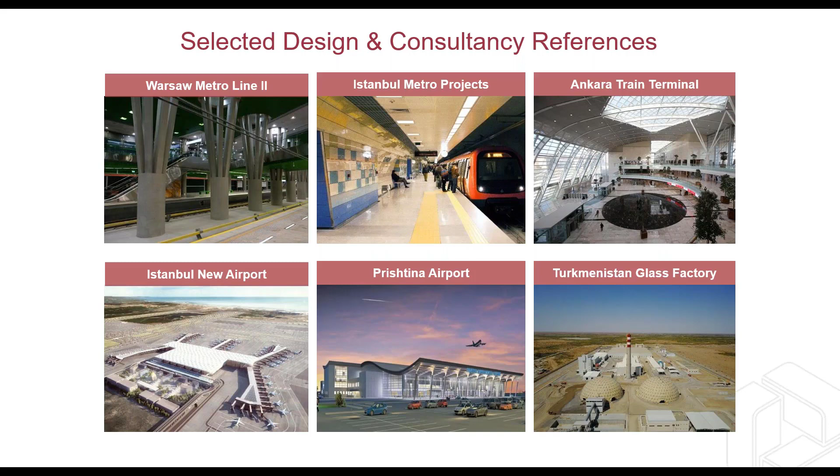So Prota Software is the software developer company. As I said, we are developing ProtaStructure, which is the ultimate solution for modeling, analysis, and design of structures.

Prota Details is for your automated detail drawings, reinforced concrete drawings. It includes intelligent rebars and design libraries, such as retaining wall, scaffold design, detailing, pile caps, pool design, and all the design and detailing libraries that you can use independent of your structures.

Prota Steel is our latest technology for your steel detailing and connection design. We have shop drawings and general arrangement drawings, as well as connection design reports.

Prota BIM is our BIM tool, which allows you to bidirectionally link your models with other BIM platforms, including Autodesk Revit. With the upcoming 2020 version, we will also support IFC import and imports of 3D DXF files. We already support the import of two-dimensional DXF files.

So ProtaStructure is the focused structural BIM design solution of Prota. Some of the capabilities are flexible 2D and 3D modeling, multi-material modeling with physical objects, analysis and detailed design to international and seismic design codes. Also, we provide full design reporting and quantity takeoff.

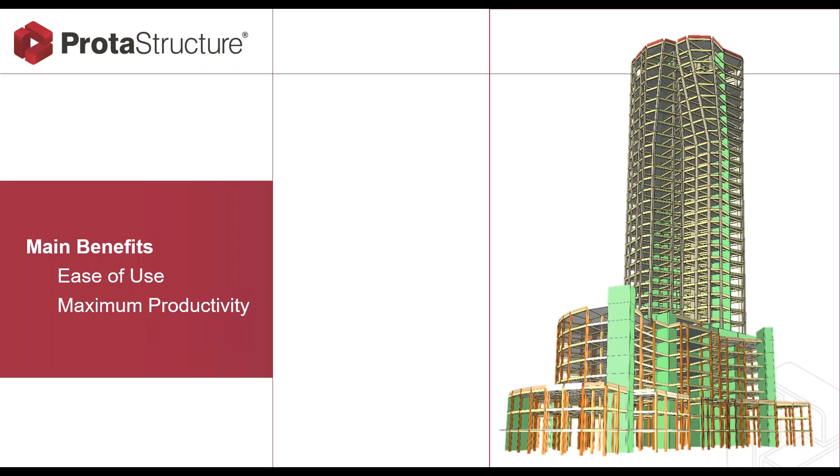So in a nutshell, the main core competencies of ProtaStructure are ease of use, fast modeling, and maximum productivity. What's our biggest advantage? As Prota, our biggest advantage compared to other solutions on the market is that we offer a comprehensive solution for our clients.

With ProtaStructure, you can design model buildings, then perform automated steel and reinforced concrete detailing with Prota Steel and Prota Details platforms. You can also coordinate your models with leading BIM players using Prota BIM. In other words, you invest in a single package and you possess all these technologies. From time to time, we demonstrate these technologies through seminars or webinars.

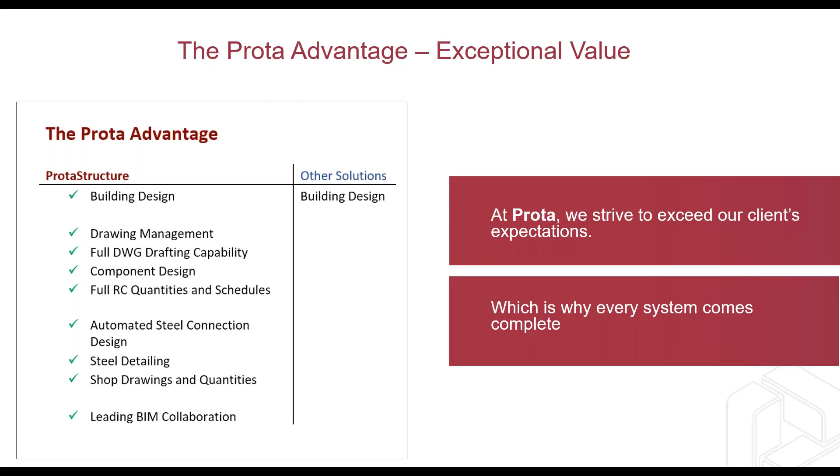But today, as I promised, we will be discussing performance-based design, in which ProtaStructure is quite powerful. So let's jump into performance-based design.

As you know, we have different design paradigms in terms of earthquake-resistant design. The conventional design paradigm is what we do: we design the buildings under a design earthquake, which usually has 10% probability of exceedance in 50 years. In other words, it will have a return period of 475 years.

What we do is design for strength under the reduced earthquake loads. We try to make sure that members are strong enough to withstand the demanded forces, and that inertia forces are safely transferred to the load-bearing system, like diaphragms or collectors. While doing that, we also try to ensure that the structure has the required ductility capacity.

What does it mean? It should be able to deform in the plastic region without losing significant capacity. And while doing that, we try to prevent brittle failure. We try to prevent undesired collapse mechanisms like story mechanism or loss of equilibrium. We achieve that by providing sufficient ductile detailing.

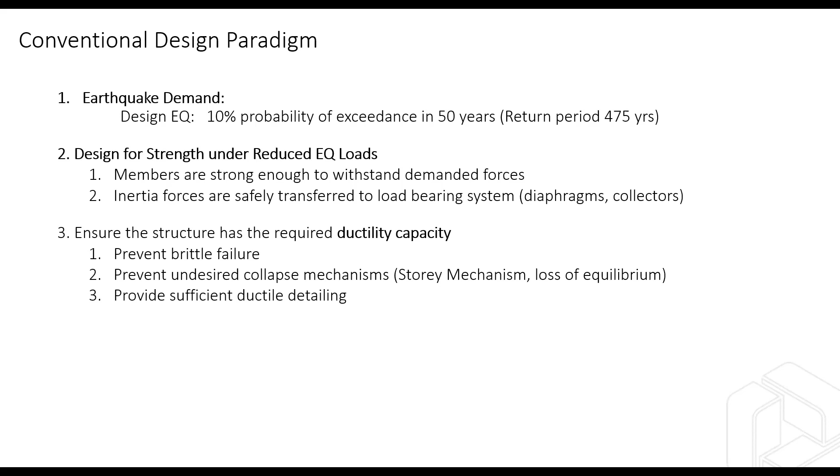If the structure was to behave elastically, we would have the elastic strength, which is Fe. But the structure, of course, behaves in a nonlinear manner. So we have a yield strength of Fy, which is nothing but the elastic strength divided by the yield strength reduction factor, which is Ry.

But we also have a design strength because we have material discrepancies. Materials can be stronger than we expect, or we may have more provided reinforcement inside the members. So the as-built structure may always be stronger than we anticipated. We also cover that with an overstrength factor, which is Fy divided by D. So this is pretty much the

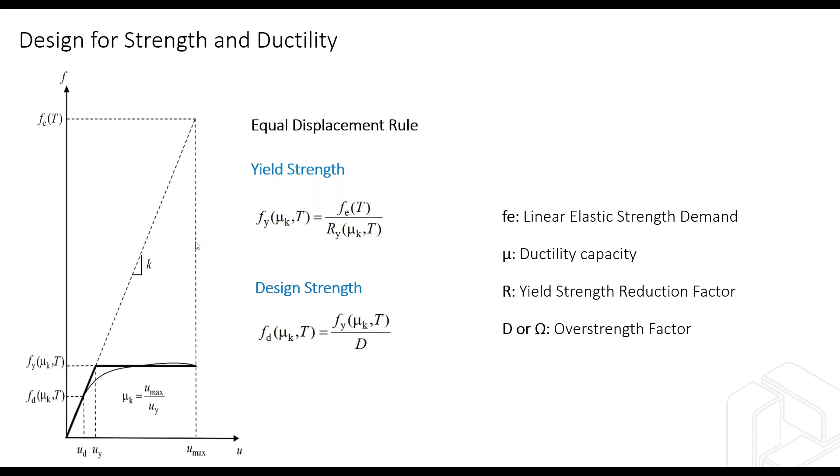conventional design approach. What we do is calculate the elastic strength demand. We assume a ductility capacity depending on the structural type and the building. We prescribe some reduction factor, called R, and some overstrength factor. By reducing the elastic demand, we design the structure under the design earthquake. Then we provide sufficient detailing to ensure the ductility. That's the conventional approach.

But why do we need performance-based design? I want to ask some questions. As I said, we usually design under a design earthquake with a return period of 475 years. So what happens if we have a severe earthquake with a return period of 2,475 years, or a very frequent earthquake with a return period of 72 or 73 years?

So what kind of performance do we expect from the building? Another question: what kind of damage is tolerable for us? No damage to structural and non-structural members, limited damage, or heavy damage but not collapse? What is our tolerable damage? And what is the cost that we can tolerate to repair the building after damage?

The conventional design philosophy tries to ensure the life safety of the building, life safety of the people living in the building, but the building can be damaged. Because of economical considerations, this damage must be repaired. So what kind of cost can we tolerate to repair the building?

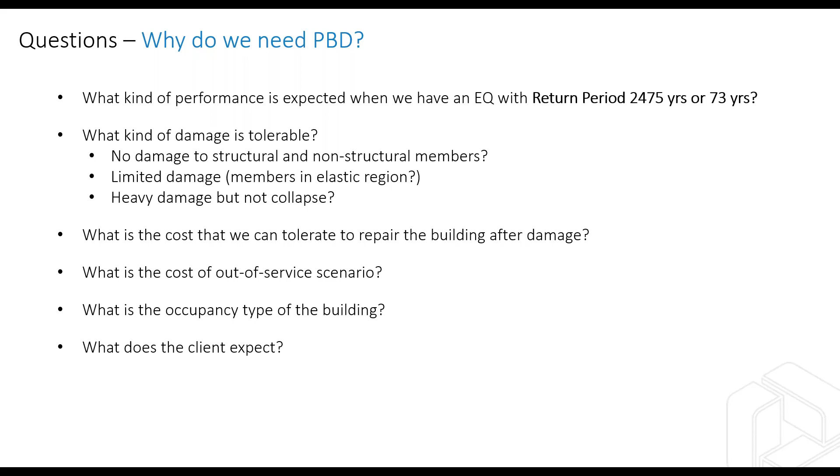And lastly, other than necessities or other code requirements, what does our client expect? Because we are engineers serving clients. If the client has money, they can expect an advanced performance scenario—a client may not even want to wake up when the earthquake happens. These are the questions that lead to performance-based design.

So for the performance assessment, we have the two faces of the medallion. In fact, for new buildings, if we are requested to design a new building with performance-based design, our job is relatively easy because we are in control of architectural and structural design. Building is new, we are in control of materials that we will use. We decide on the budgets versus expected performance. And we can also fine-tune the system by using seismic devices like isolators, viscous dampers, and so on. So for new buildings, performance-based design will allow us to consider these items.

But for existing buildings, we work with existing material and structural system. We may have existing damages to structural members, which is very critical. They may be repaired or they may be beyond repair. So there is an unknown factor, or if we didn't do sufficient survey in the building, we may have missed out these damages as well.

The architectural function is important. While retrofitting the existing building, you must not prevent architectural usage too much. So we must be careful with the architectural function as well. So that's another difficulty in existing buildings.

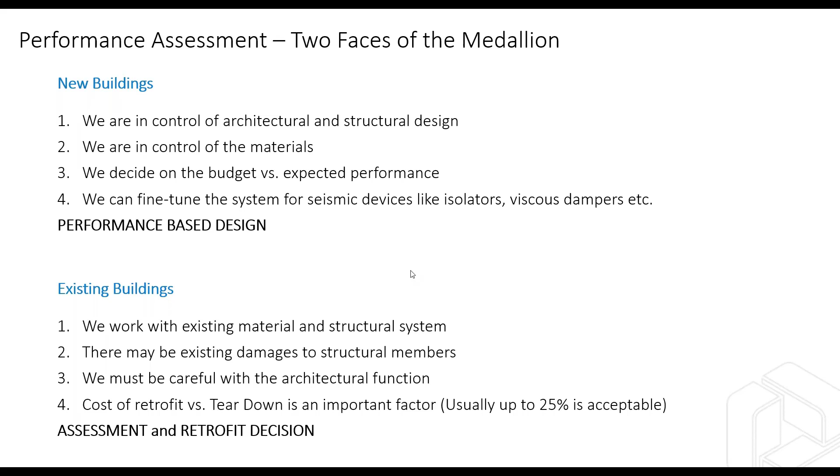Also, cost of retrofit versus tear down is an important factor. Usually up to 25% is acceptable. So if you are going to tear down the building and rebuild it again, if the retrofit cost is not exceeding 20-25%, it can be acceptable, but more than that should be considered. So after assessing the performance of an existing building, we decide on retrofitting the building or tearing it down. So there are more unknowns and more parameters out of our control in existing buildings.

I want to talk about analysis approach while we are designing the buildings against earthquakes. So, of course, the simplest approach is the linear elastic analysis. And the finite element members that we use in linear elastic analysis are also assumed to be linearly elastic, so force deformation relations are constant. That brings us ease in modeling and less computational effort. But of course, in terms of nonlinearity and performance assessment, linear elastic behavior is not so accurate because it doesn't have any damage memory. It doesn't behave nonlinearly.

So although it's the simplest approach, it's not so accurate for performance assessment purposes. It's quite acceptable for conventional design, as I explained before.

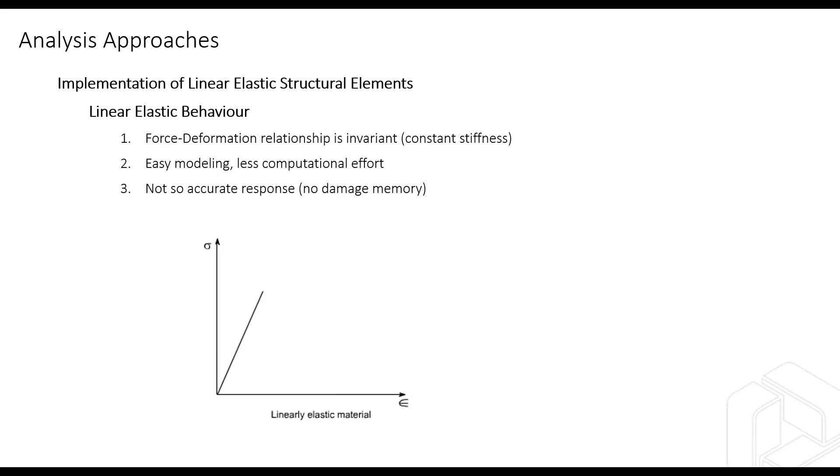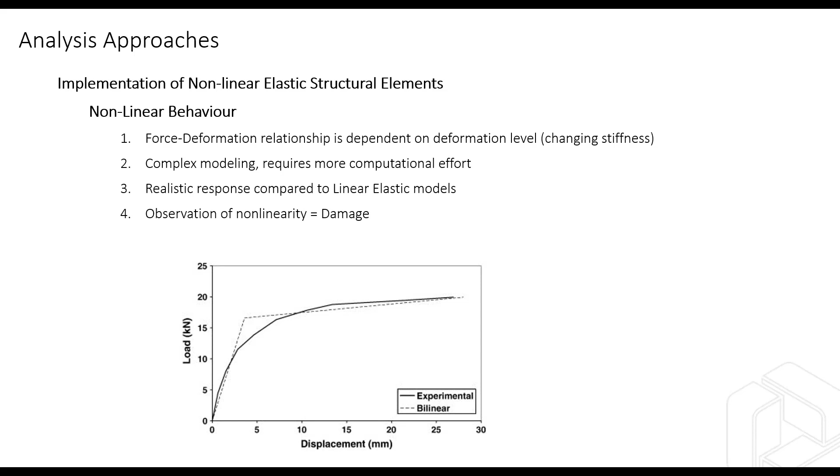The alternative is the nonlinear elements and nonlinear analysis. So when we use nonlinear elements, what we mean is the force deformation relationship is dependent on the deformation level, so the stiffness is changing. Also, it requires complex modeling and more computational effort. It's more realistic, and also the nonlinear force deformation means a representation of damage. So nonlinear approaches are more accurate in terms of performance assessment.

So for conventional design, what we use as linear elastic analysis is, first of all, the simplest one, the equivalent static method. Equivalent static method, of course, does not consider the effect of higher modes. That's the most important drawback of this static force approach. It does not consider higher mode effects. It's usually valid for relatively regular buildings with high mass participation.

But since it is approximate, seismic codes are applying penalties to that. If you have floor torsion, you have to increase the accidental eccentricities. If you have weak stories or soft stories, you have to change behavior factor or you have to change your method of analysis. So it's the simplest, but it's the most approximate approach.

The other approach for linear elastic analysis is response spectrum analysis. It's a good approximation, actually. But still, it assumes that the modes are independent. It assumes no mode coupling between the modes, and also it's based on calculating the pseudo responses of undamped modes.

So for linear elastic systems, it's quite a good approximation. But there are some disadvantages. One of them is after SRSS or CQC combination, we lose the force displacement signs, and of course we lose the equilibrium. Although we calculate the base shear, we have to scale the base shear up to static base shear level. That's another thing we have to do. Another disadvantage, or the point that we must pay attention to, is the mass participation. It's an issue. If we don't select a sufficient number of modes, then higher mode effects can be skipped.

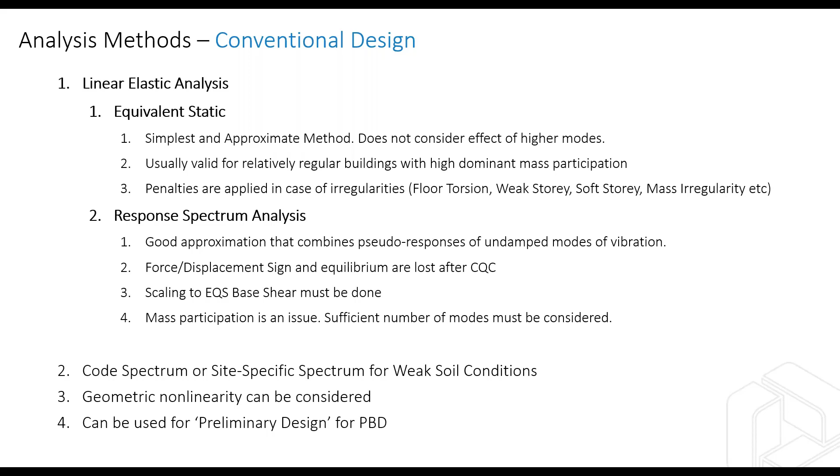Conventional design or linear elastic approaches can also be used as a starting point for performance-based design. Because nonlinear assessment requires section sizes and rebars to be available as input, we have to do a preliminary design first, using conventional design approaches as a starting point.

So for performance-based design or assessment, what kind of analysis methods do we have? First of all, we have linear elastic assessment methods.

In the literature, researchers always tend to invent new methodologies or easy methodologies that everyday practicing engineers can make use of efficiently, because as analysis methods get complex, the computational effort, assumptions, and parameters get more rigorous and difficult. So the simpler the method, the easier it is to use by practicing engineers.

One of the methods that's quite easy to implement is the linear elastic assessment method. In this method, we perform an equivalent static or RSA analysis, like in conventional design, but in this case we assume the reduction factor is 1. We don't reduce the elastic demand.

We assume the building is not important, so the importance factor is 1, and the additional eccentricity is 1. We normalize the building, we don't assume any ductility, and we don't assume any additional eccentricity. We use the elastic conventional design to calculate the elastic responses.

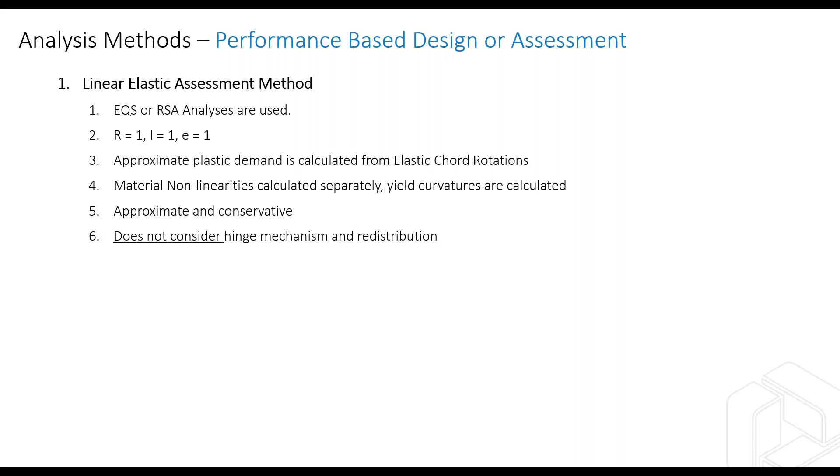Another widely used method of analysis is static pushover analysis. Simply, we incrementally load the structure until it is not stable. While pushing it in the X or Y direction, we plot the base shear versus roof displacement.

Then we convert that shear versus displacement graph into the spectral acceleration and spectral displacement domain, and we compare it with the target spectrum to find the demand that the earthquake demands from the structure.

In this analysis, material nonlinearities are considered in the critical sections where we expect the highest demand.

But one serious disadvantage or drawback is the lateral load vector. Since we push it with a certain type of load vector incrementally, the shape of that load vector affects the results a lot. Some alternatives are constant loads, inverse triangular loads, or the shape of the first modes. Usually we use the first mode, but the ideal shape is the nonlinear deformed shape.

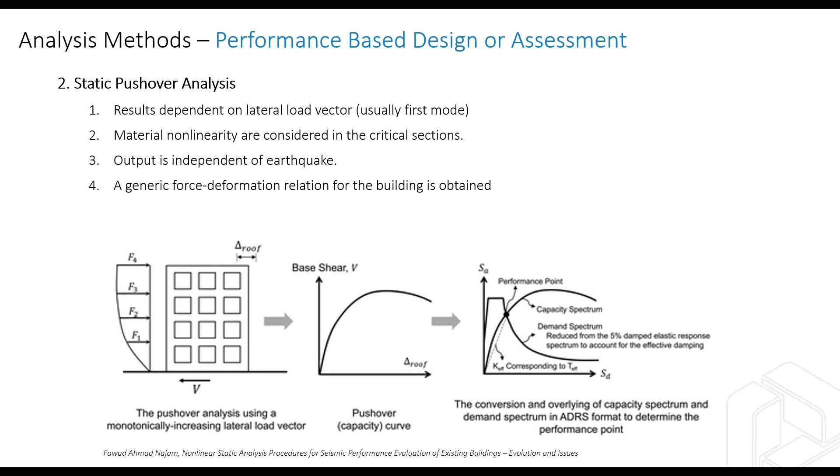As I said, the single mode static pushover is considered an approximate method because of the higher mode effects. In fact, it is not applicable for buildings more than 8 or 10 stories, or buildings which have participation factors less than 70% mass participation, or buildings with high extreme floor torsion situations. This static pushover will not be applicable.

So in the literature, we have other methods like multi-mode pushover analysis. But unfortunately, in this field, there are multiple approaches. The main problem is the superposition problem. Since most methods assume modal coupling is ignored, we usually cannot go back and superpose the nonlinear system. We cannot just combine them with CQC or SRSS.

That's the main drawback. But of course, there are several publications and methods developed. They either combine loading first, or after loading combine response, or do a series of pushover analyses and combine the results. Unfortunately, there isn't a widely accepted method currently available. The static pushover, unlike multimode, has been used for a very long time and is somewhat generally accepted, but we don't have any widely accepted method for multimode pushover analysis, and there are no recommendations on that.

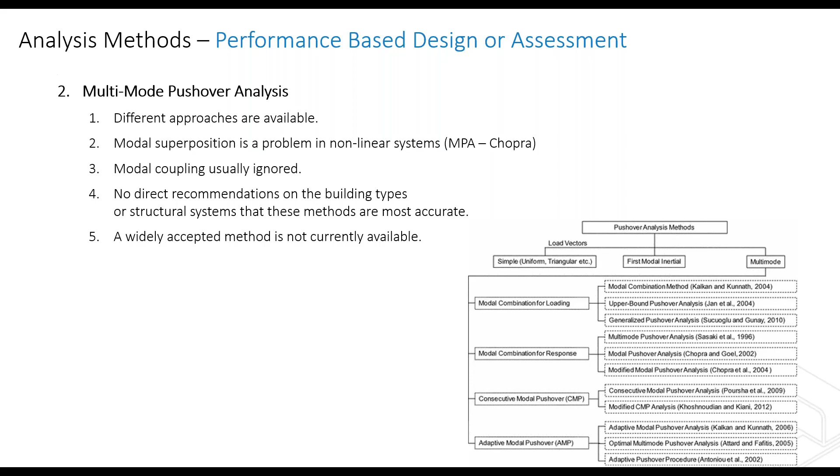And finally, we have the nonlinear time history analysis. This analysis is considered to be the benchmark in the prediction of response. We have an accelerogram, a ground motion record, and by using the dynamic equilibrium equations, we apply this acceleration to the building with direct integration or modal response history methods. But since the accelerations are both negative and positive, we need hysteretic material definitions.

That's one important thing. Also, if you remember the dynamic equilibrium equation, we have acceleration, which is multiplied with mass. We have displacement, which is multiplied with stiffness matrix, and we have the derivative of displacement, the speed, which is multiplied with damping matrix. But as you know, damping...

Damping is not a very easy parameter to obtain. So what we do, we usually assume 5% critical damping for reinforced concrete structures, but it's just an assumption. It's during the earthquake, because of the cracks that happen in the concrete or damages, we assume that approximately there is a 5% damping.

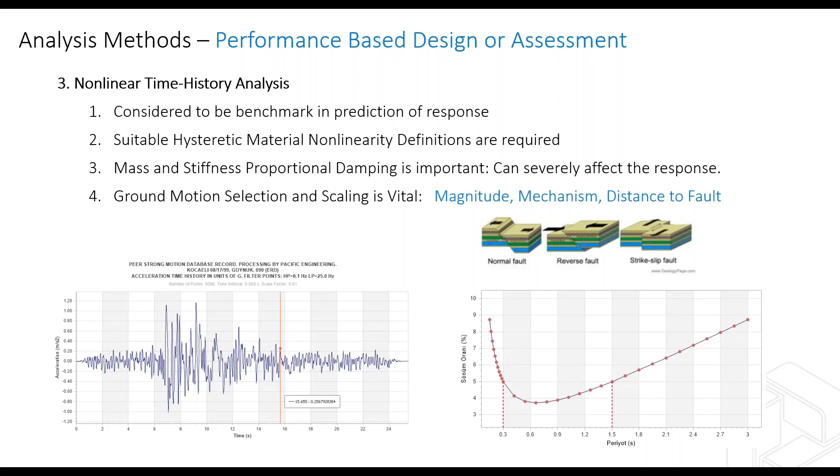But that's not finished. After you process your ground motions, you must use 3 to 11 ground motions. You cannot just use one ground motion. You are not allowed to do that. You have to use 3 to 11 motions, and at the end of the analysis, you must calculate their maximum or average responses.

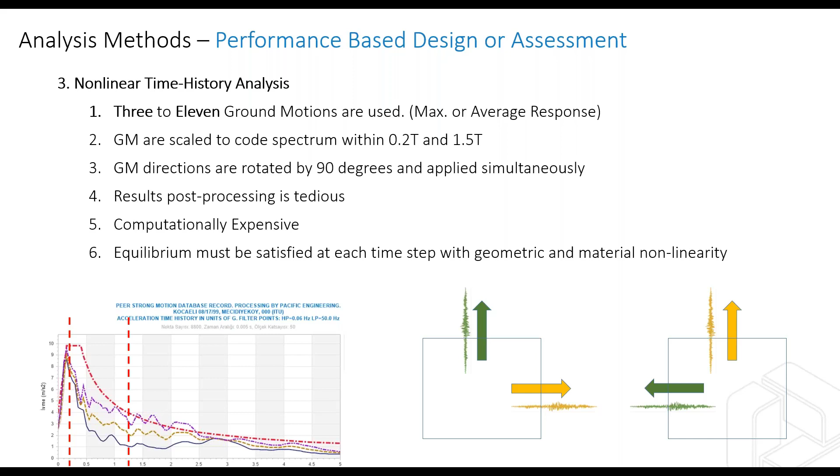As a consequence, we can say that post-processing of nonlinear time history is quite tedious. Also, the analysis itself is computationally very expensive because equilibrium must be satisfied at each time step with material nonlinearity, because we assume that we have distributed or lumped plasticity at the critical sections. And if you include geometric nonlinearity like P-delta, you have to also iterate for those as well. So it's a very complicated and computationally expensive analysis.

So that was pretty much the nonlinear analysis methods. As you are aware, I'm not showing anything in ProtaStructure because performance-based design topic is quite theoretical, and in order to proceed with the computer software, we must understand the underlying theory and underlying analysis and modeling approach very clearly, so that's what I'm emphasizing today. I'm sorry if it is a bit boring for you.

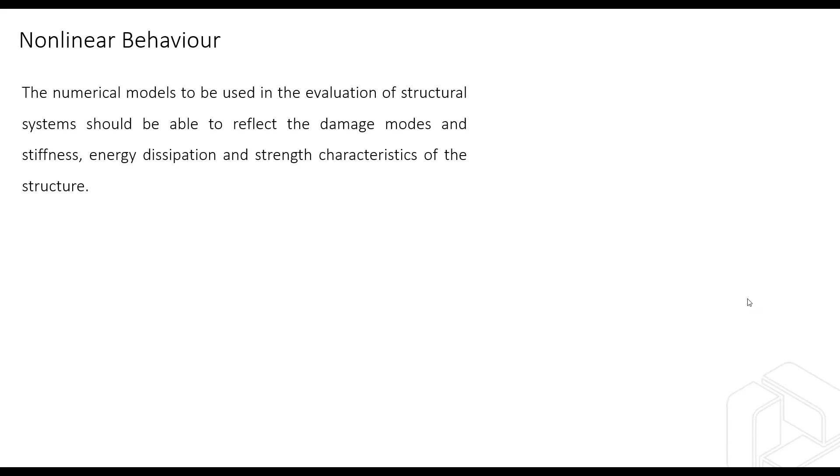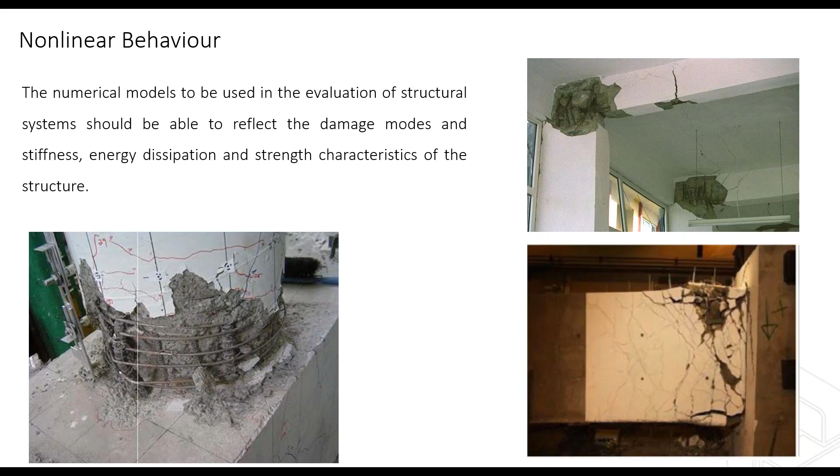So in all these pictures, you see some sort of damage in the structural members, and deformation characteristics. The numerical methods we use must be proficient enough to reflect these damage modes and energy dissipation characteristics in the model itself. Usually these damage modes, stiffness and energy characteristics are calculated from experiments, and material models and nonlinear models are developed. These must be reflected in our simulation models. What we do with the software is, of course, simulation.

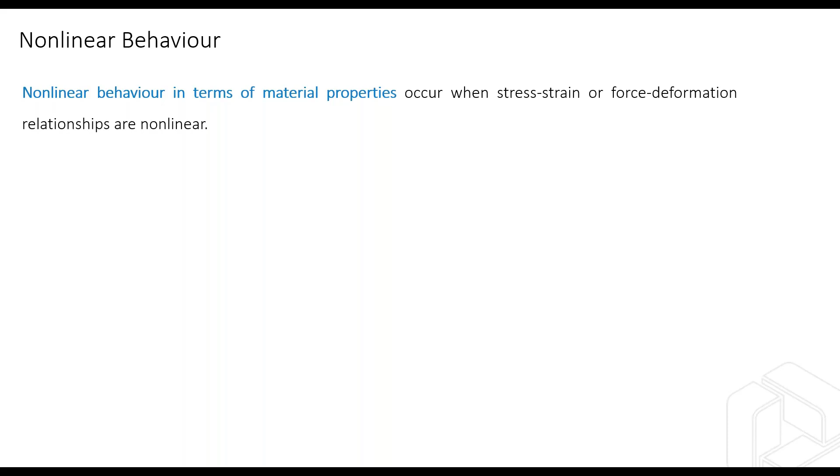We have material nonlinearity, which occurs when the stress-strain or force-deformation relationship is nonlinear. That's what we call material nonlinearity. Geometric nonlinearity is different. The material can be linear, but because of the geometry, imperfection, or dimension of the structure, we may have second-order effects like P-small-delta or P-large-delta. Then we will have unexpected moments, unexpected increased internal forces due to these imperfections or simply geometric characteristics. So this is what we call geometric nonlinearity.

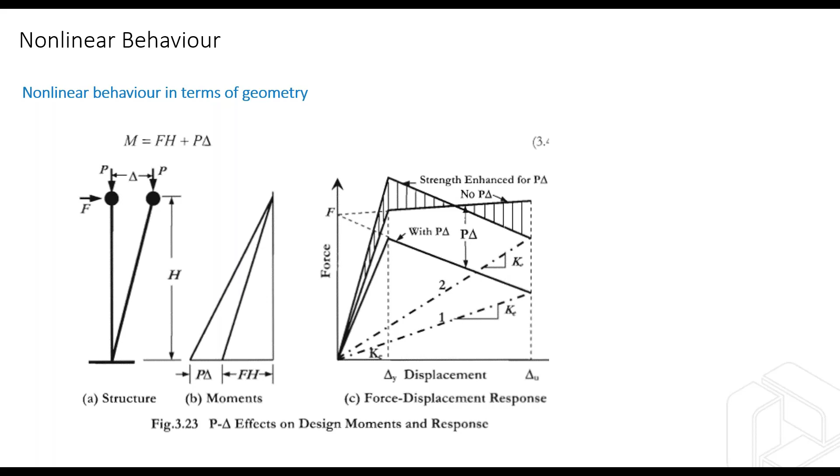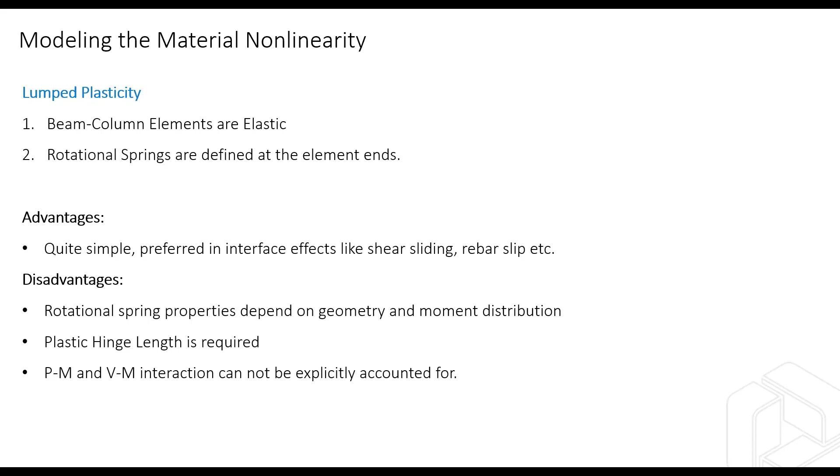And what about material nonlinearity? If you forget about geometrical nonlinearity for the moment, for material nonlinearity, one of the methods we use is lumped plasticity. In this approach, beam column elements are elastic and rotational springs are defined at the end of the element nodes. So at the critical sections, we have two rotational springs, assigned stiffness characteristics compatible with the material properties, but the beam column element in between is elastic.

The advantage of this is it's quite simple and not computationally very difficult. It can be preferred for interface effects like shear sliding or rebar slip because the output it gives is a plastic rotation. You can compare this plastic rotation value with the plastic rotation limits you obtain from experiments, for example. In a certain experiment, you may have a plastic rotation limit that also includes a rebar slippage factor, etc. So the macro output, the plastic rotation, is quite useful, but it has disadvantages, of course.

Rotational spring properties depend on geometry and moment distribution. We need a plastic hinge length to estimate the extent of nonlinearity in the critical section, but it's usually taken as the dimension over 2. Most importantly, especially in column elements, we have an axial load moment interaction. We cannot really explicitly simulate or reflect the axial load moment interaction in lumped plasticity models. What we supply to the software is the moment-rotation relationships, and we also supply interaction relationships. When the critical section reaches its capacity, we try to stay on the interaction curve so that we can honor the axial load moment relation.

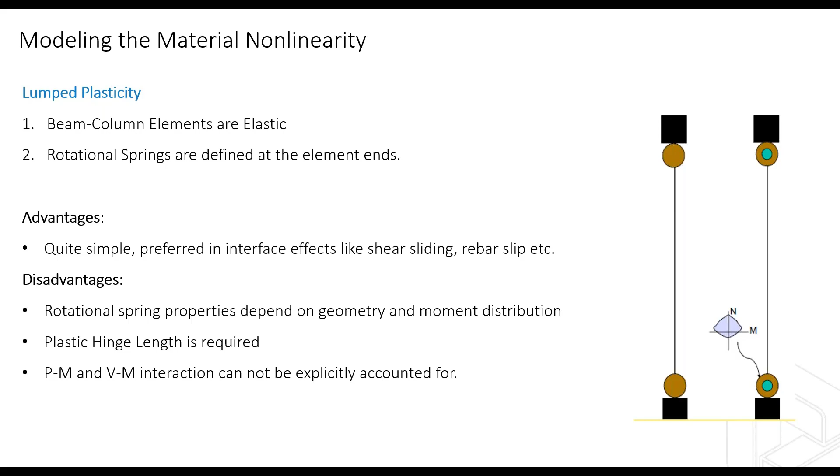The state-of-the-art approach at the moment is to use fiber sections. What you do is mesh the concrete section together with the confined and unconfined concrete and the steel bars. By using these fibers, you connect these section stiffness matrices to building stiffness matrices. That's the most advanced approach. Other than that, by using this fiber analysis, you can obtain the force-deformation relationship and assign them to the plastic hinges as well.

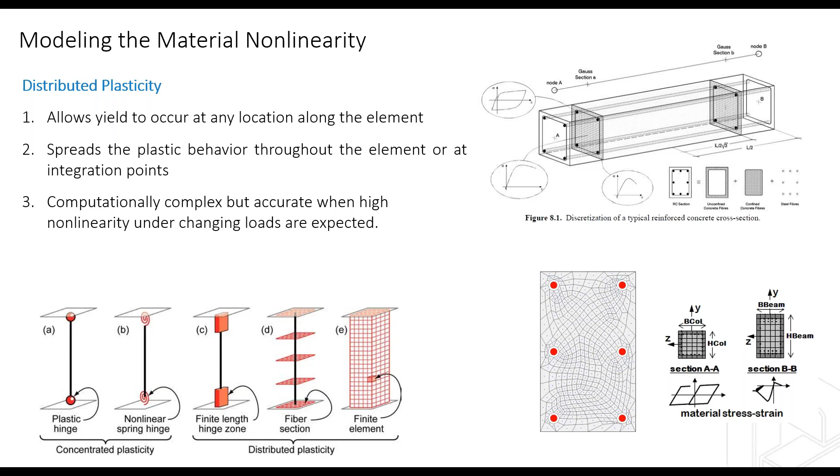That's another approach, but what we do in ProtaStructure is we use distributed plasticity. We use the finite length zone approach. It is not a fully distributed plasticity; it's actually a trade-off for simplicity. It's not fully nonlinear - nonlinearity is confined to the end regions. We expect the highest demands at the end, so we use distributed plasticity at 6 integration points in these confined regions, and the element in between is a linear elastic element.

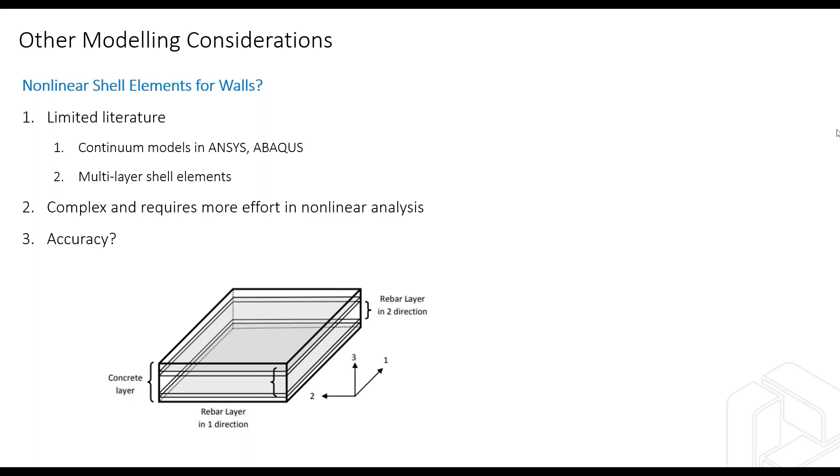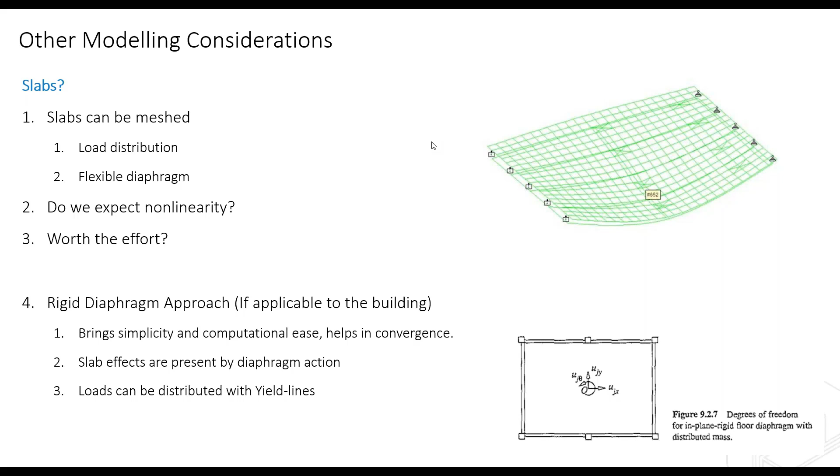You can also distribute the loads with yield lines; you don't have to mesh for load distribution. Of course, these remarks only apply if your building permits this. If you have a highly irregular building with gallery openings, separate diaphragms, or slabs that cannot act as a rigid diaphragm, then you'll have to use slabs as finite element mesh.

What about non-structural members? In buildings we have partition walls and machinery. What we usually do is include their loads and calculate them during design, acting on the structural members. But in performance assessments, if you desire, you can model infill walls with simple approaches, including them as compression-only composite strut and tie models. If you push the building from one direction, the compression members will be active; if you push the frame the other direction, the compression will be reversed. So you will need to spend some effort doing that.

But the question is, of course, is it really worth it? I want to put a question mark here too, because people usually tend to model everything in the building, but at the end of the day the results may not be accurate, or it may not be worth the effort.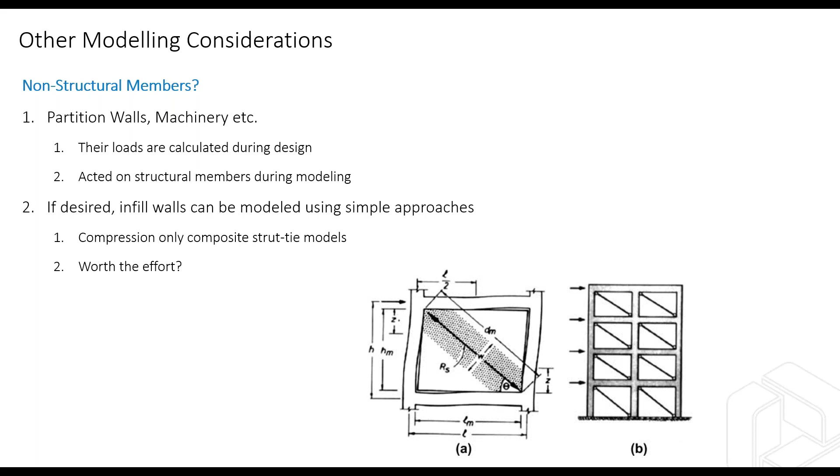Another question mark I want to put here is soil-structure interaction. What can we do if we expect nonlinear soil behavior, and what if we have piles and pile groups under the building? How will we model the lateral pile supports, the effect of the soil on the piles and on the upper structure? These are all big question marks, really big question marks.

So after discussing this modeling approach and analysis approach, what do we do for performance-based design? What is the essence of the thing? For performance-based design, we want to reach a target performance. For example, from the Turkish earthquake code, for new buildings we have regular performance targets and advanced performance targets. If you pay attention, the regular performance target is nothing but controlled damage.

It means the building should satisfy life safety requirements with repairable damage, using the strength design method. When we apply the code clauses and equations under the design earthquake with a 500-year return period, this condition is satisfied. But what if we have a different building? If we have a critical seismic design category, meaning the building is higher than 70 meters, experiencing high spectral accelerations, and has an important occupancy, then we have to satisfy three different performance levels simultaneously. For the design earthquake, the performance target is the same.

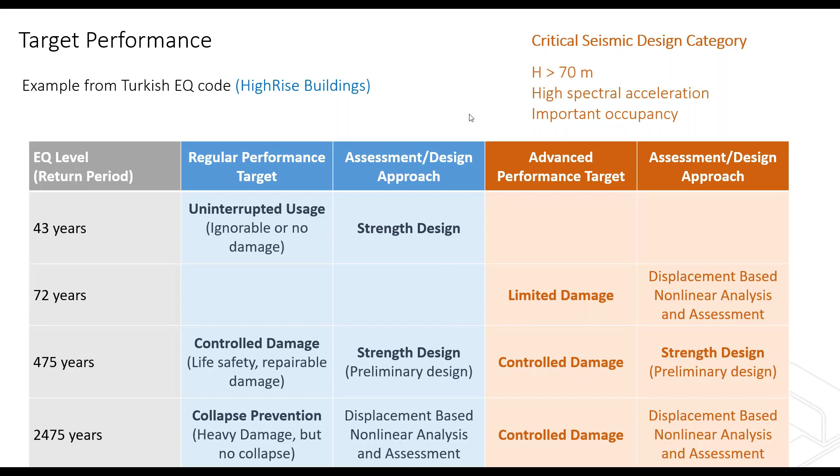Existing buildings are similar, so first of all, for existing buildings, we cannot use any strength design because the building is existing. We cannot assume any ductility or attach any ductility to the building, so we must use a displacement-based assessment, and we must satisfy these conditions.

So why did I give you these tables? Because I think it's very important to understand this if we want to understand performance-based design. Unlike strength design, when we start the project, we have to look at these tables and understand what kind of performance criteria we should be satisfying for the project. That has to be defined and decided before starting the project. The analysis methods are dictated or recommended by the guidelines or by the codes.

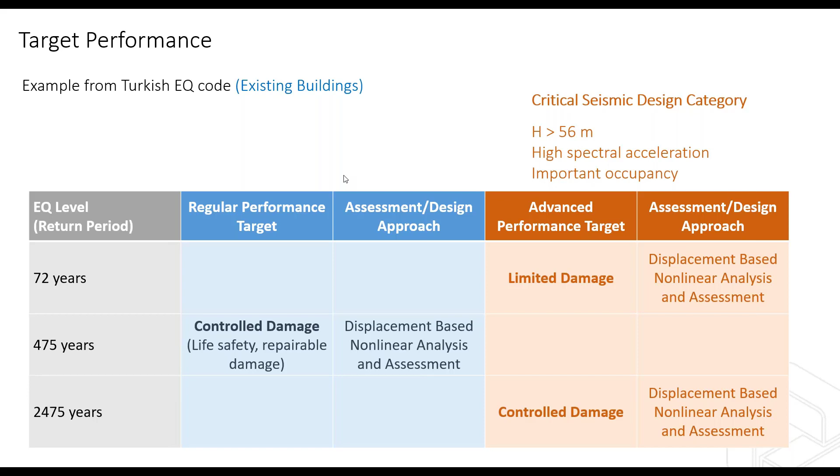Usually for the assessment of buildings, a peer review is required by the Turkish codes, as a side note. And of course, after setting these targets, what we do is check the members to see if they satisfy the target performance.

For example, if we are using lumped plasticity models, we have to use the plastic rotation limits. For collapse prevention, we have plastic rotation limits calculated with a formula. For controlled damage, the limit is 75% of this plastic rotation. And for limited damage, of course, we don't expect any plastic rotation in the members.

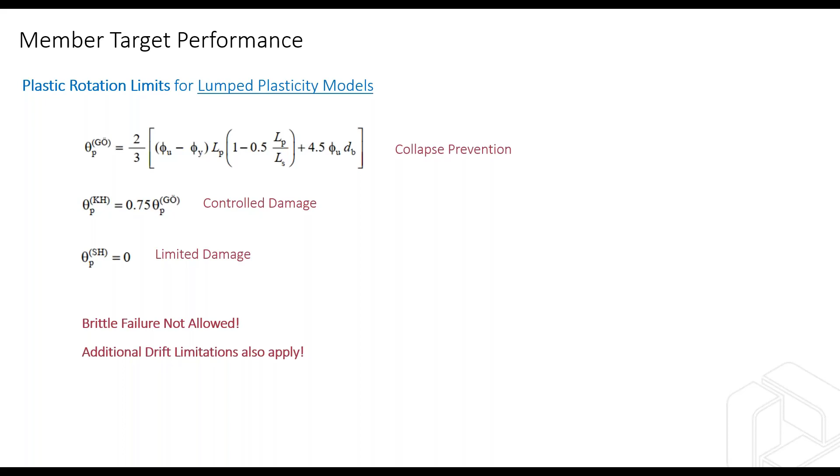What we do is classify the members according to this, and we reach a conclusion—so if the building itself satisfies the performance or not, we simply count the members. Of course, brittle failure is not allowed, and additional drift limitations apply. The plastic rotation limits may be satisfied, but a building may still be violating some drift limitations.

That's another thing. If you are using distributed plasticity, then we must compare the concrete strains and the steel strains—the most critical concrete strain and the most extreme steel strain. These limits are also given in the codes or guidelines. For each member, you have to satisfy these limits, so you count the members again and classify accordingly. Again, brittle failure and drift limitations must be paid attention to.

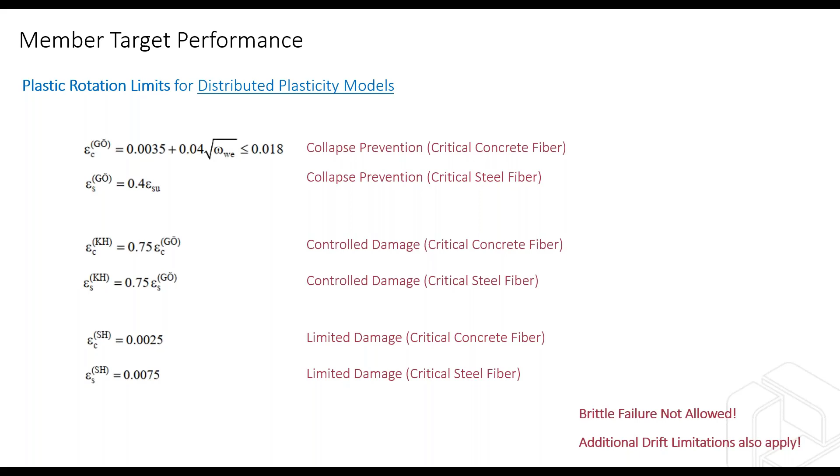So this is pretty much the theoretical part that I want to cover. I hope I could explain it to the best of my knowledge. Now I will briefly show an example in ProtaStructure.

I will try to assess a typical school building. It's a 3-story frame structure with 14 megapascal existing concrete and 220 megapascal existing reinforcement. Actually, these kinds of schools are very common in Turkey, built before 1997, 1999, and we had lots of these school buildings. We, as Prota, also retrofitted lots of these school buildings.

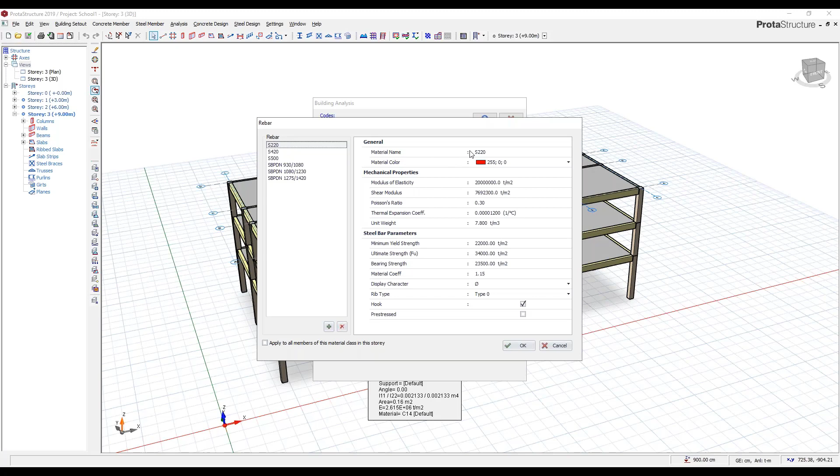So as a result of surveys or blueprints of the building, we see that the columns, longitudinal bars and links have a characteristic yield strength of 220 megapascal. Okay, so this is the existing material, and we have the existing geometry already defined in the building.

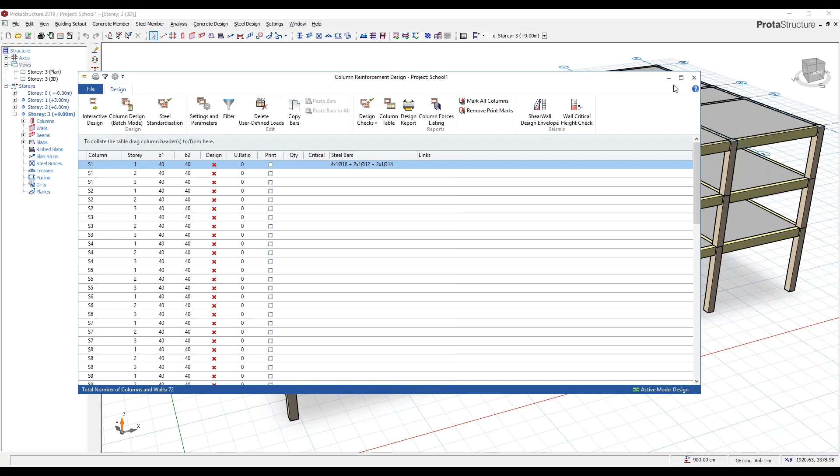At this point, what is missing is the existing reinforcement. If you have the blueprints of the building, what you can do is go to the column design menu, double click, and without doing any design, you can change the rebars.

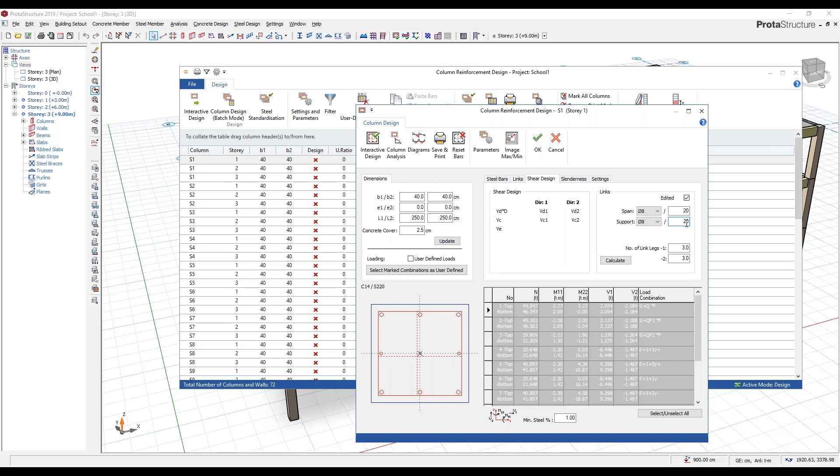You can set the links, like in the span region I have phi8/20, and in the support region I have phi8/15, very minor or no confinement as well. Maybe it could be the case - some of the buildings do not have any confinement in their support regions of columns.

So what you can do is just enter the reinforcement information and hit OK. You don't have to satisfy the design status here. All you need to do is enter reinforcement information.

This design status can be a red cross - we are not aiming to design the column, we are just aiming to enter the existing reinforcement information. That's what we want to do. So that's why I only enter the reinforcements, longitudinal bars, and links, and I press OK. I don't care whether it is green or cross.

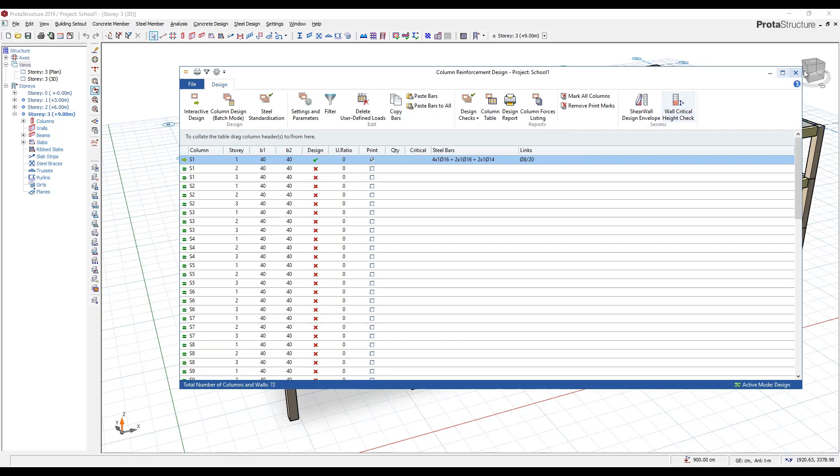This is useful - if you have similar columns, you can copy and paste to all columns. But this is what you can do if you have blueprints available. Sometimes we don't have the blueprints of the building available, and as a result of the survey, you may have some estimated reinforcements.

You can also define those in the assessment menu. What I will do is just go to Analysis and Building Assessment menu.

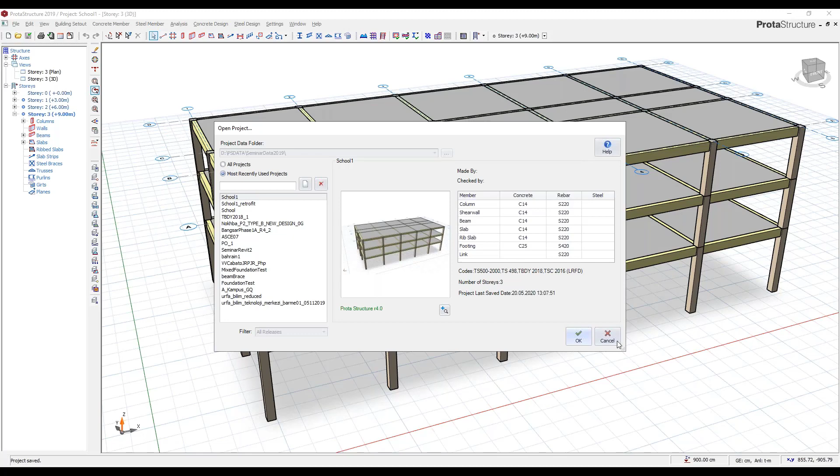So here in this menu, first of all, I have to select my analysis method. I want to do a pushover analysis. This is just preparing the analysis model first in order to set some initial parameters for pushover.

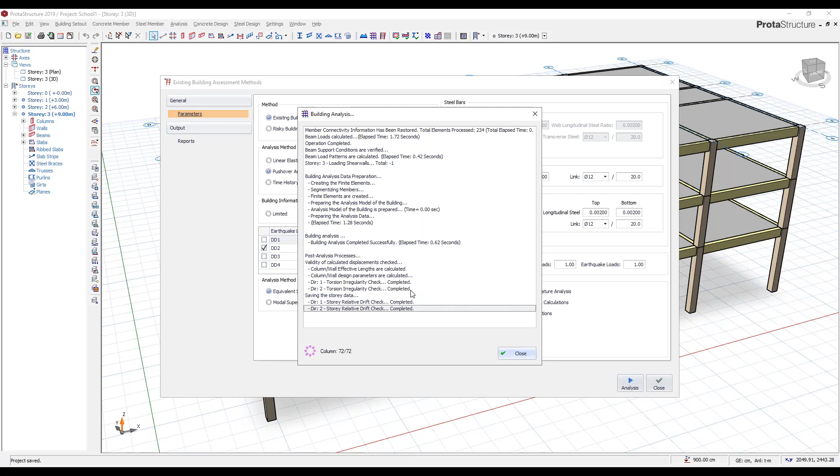Okay, then I need to set the building information level. Depending on the level of survey you did in the building, you may have detailed information. Detailed information means you did a detailed survey plus you have the blueprints of the building. If you don't have the blueprints, you will definitely have limited knowledge.

And if you have other custom information levels, you can just change the factor here. This factor is used to decrease the member capacities. That's how we use it.

Sorry, there are children outside shouting.

And in the table below, we have performance. I already explained the performance - what's performance? What kind of performance goal we want to achieve under what kind of earthquake level. So here DD2 is a notation from the Turkish earthquake code, but it means design earthquake. So under the design earthquake, 10% exceedance in 50 years, we will try to satisfy controlled damage.

By checking these options, you can try to satisfy multiple performance criteria at once. But I will not just care about the rest - I will just concentrate on this performance level.

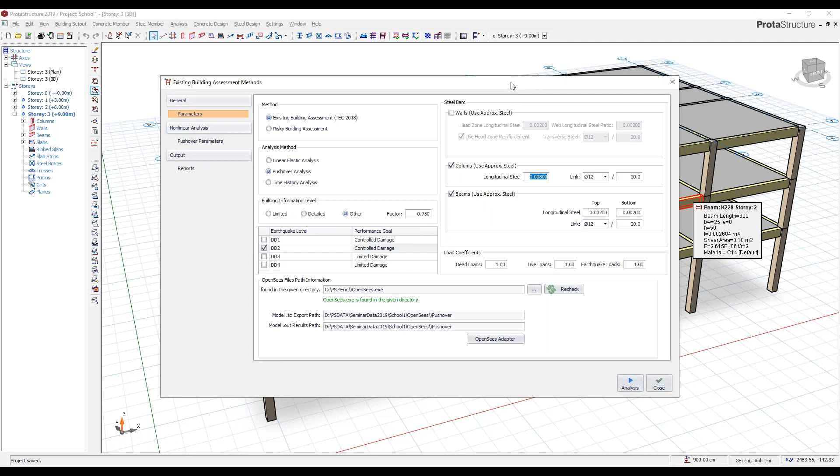Okay, after I set these parameters, I will go to the pushover. I will set the pushover parameters here.

I will have a 200-step pushover. I will push the building in the X direction. The node I want to monitor is this diaphragm master joint at the third story, which is D3-1. And I want to push the building up to 0.15 meters. Let's do the analysis.

What we are doing now is we are creating the force deformation relation of the members. We are using the fiber discretization under the hood.

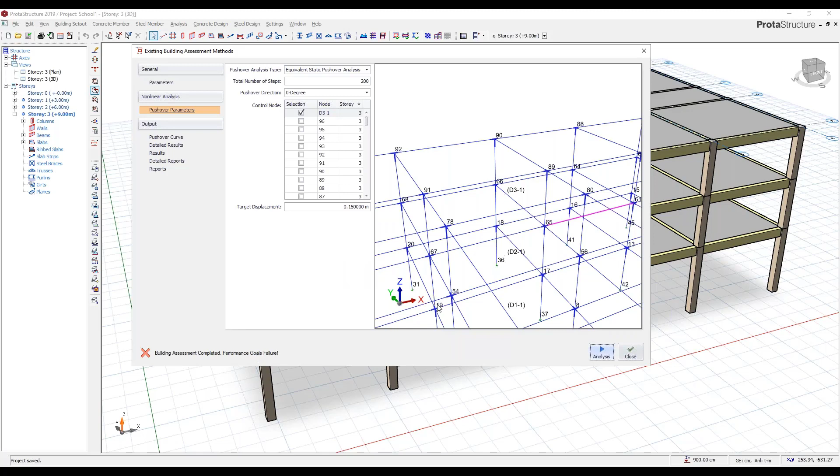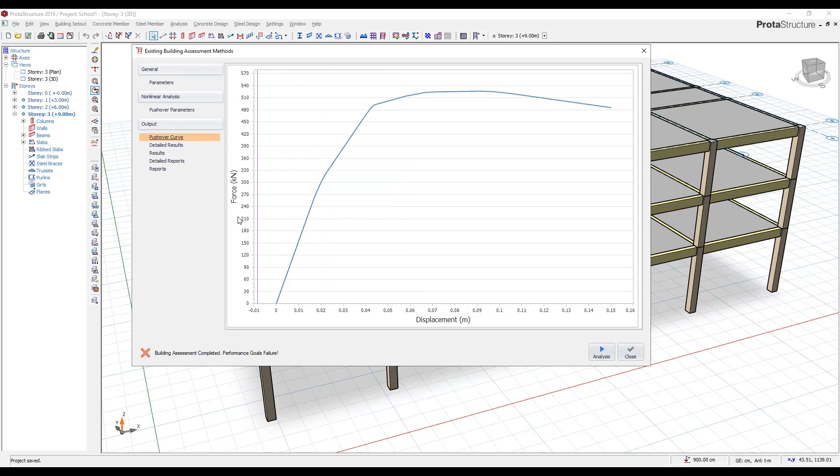And it says performance goals failure. We cannot satisfy the performance goals. We have the pushover curve calculated like this. At the end of this exercise, I will have just a couple of slides about these curves and the reports. If you check the report, we will investigate the reason of the failure.

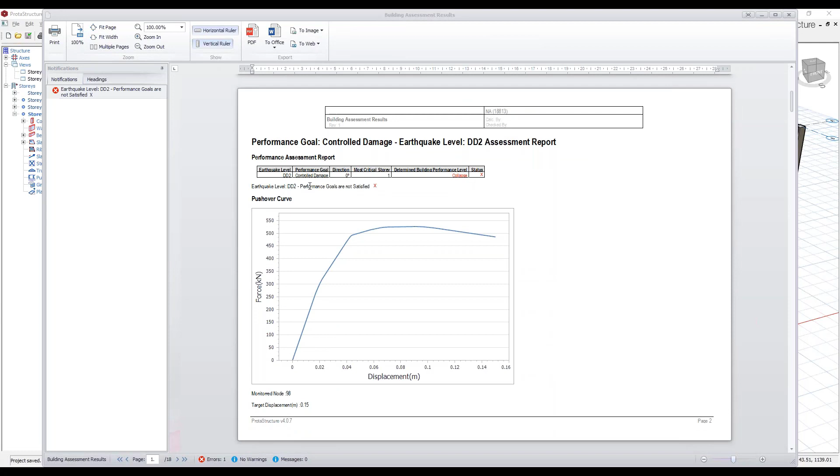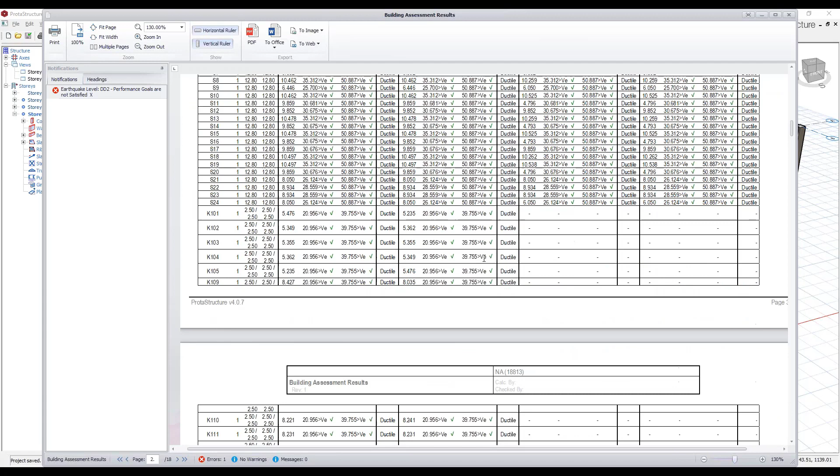Okay, first of all, the controlled damage criteria is not met. Performance level is collapse. When we check the member failure type table, we classify the members according to their failure types. We don't have any brittle members, but looking at the number of vertical members, the percentage of columns or shear walls - we don't have any shear walls, but percentage of columns in the failure region is 33%. It's exceeding 30%.

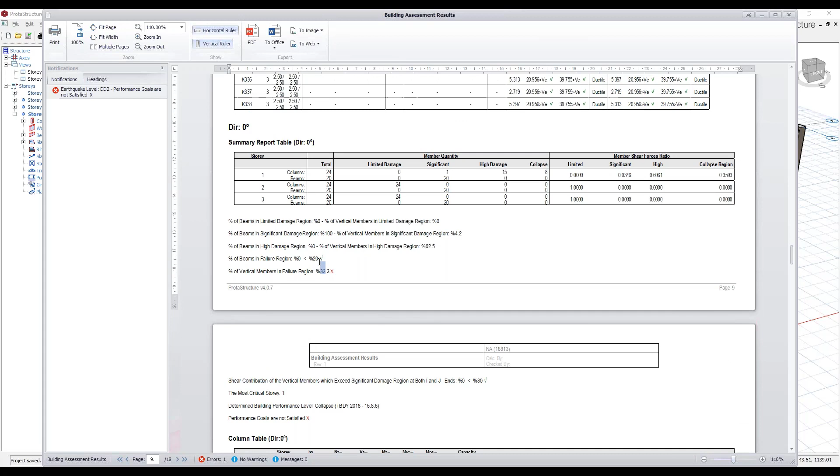So that's why the performance criteria is not met. That means we have to do a retrofit operation here. But our first consideration must be to improve the structural system. There are two tendencies here. Engineers usually tend to put column jackets in the failing members, so they want to just repair them or improve their performance individually. But if you want to cure the building, instead of removing the symptoms, you have to cure the disease.

We have to improve the structural system instead of trying to put column jackets to each and every column that we see which are failing. We have to improve the structural system. Maybe because of the lateral deformation, the building is suffering a lot. So if we can limit the lateral deformation and if we can increase the lateral strength, then maybe the building can be retrofitted quite good.

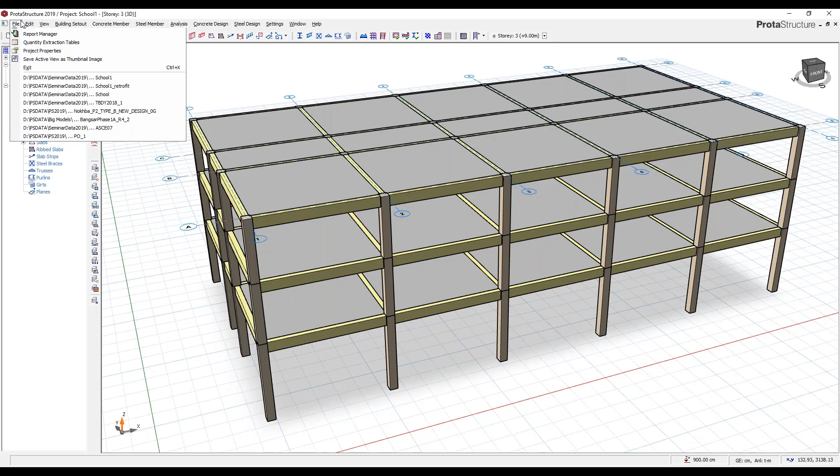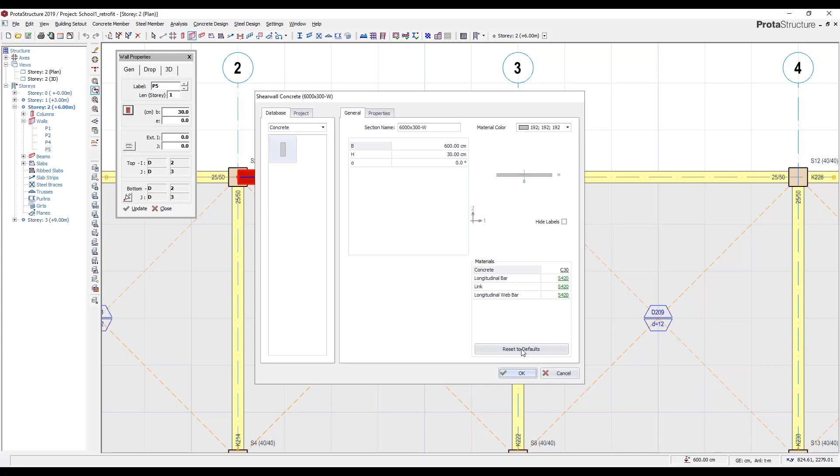So the strategy I will apply here is - I can show in another model what I did. At these frames, I introduced these retrofit walls. If you check their properties, the wall model is the retrofit wall model, and their material is C30, 30 megapascal compressive strength with a 420 megapascal yield strength in reinforcement. So these walls are not using the default materials. Default material was, remember, 14 megapascal, but these walls are new, and these are using new materials.

But again, the question is what I try to do - I try to put the walls in a symmetrical manner so that I don't introduce any accidental torsion to the building, because I don't want to disrupt the load distribution. Otherwise, I may make it worse by introducing unsymmetrical retrofitting members. Anyway, first of all, I need to select a reinforcement.

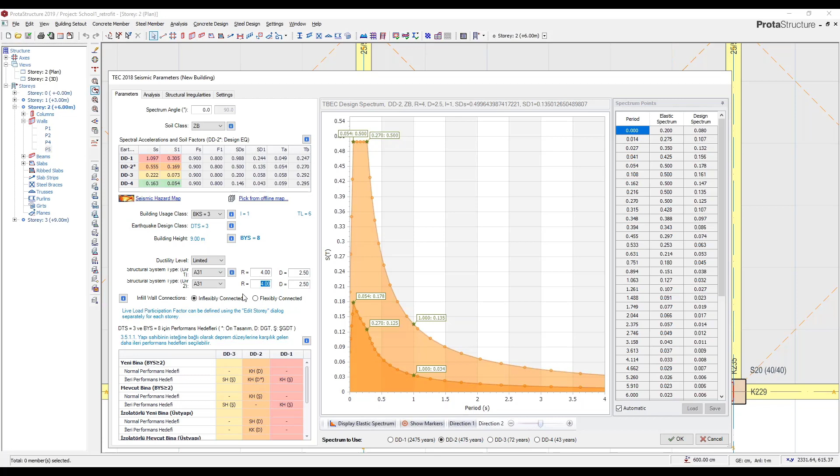I need to estimate the reinforcements inside the retrofit walls. For that purpose, what I do is I just go to seismic parameters. I just assume that the ductility factor is 4. It's just a preliminary design. I want to put some initial reinforcements to the retrofit walls. So for that purpose, I am selecting the behavior factor as 4. And I'm analyzing the building.

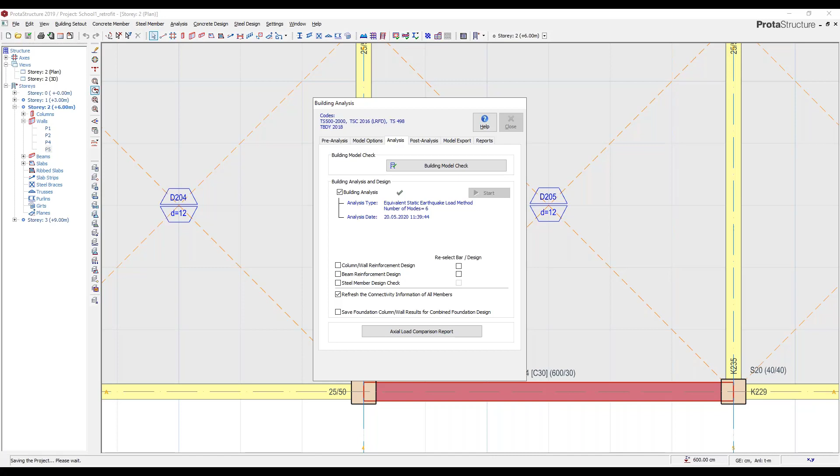I want to emphasize again, for the existing buildings in ProtaStructure, my purpose is not to design the building. I want to put some reinforcement in it. It can be the existing reinforcement, or it can be a preliminary reinforcement for retrofit members. And I want to assess their performance. I will not be interested in their design status, whether they are okay or not. Their status will be dictated by the performance.

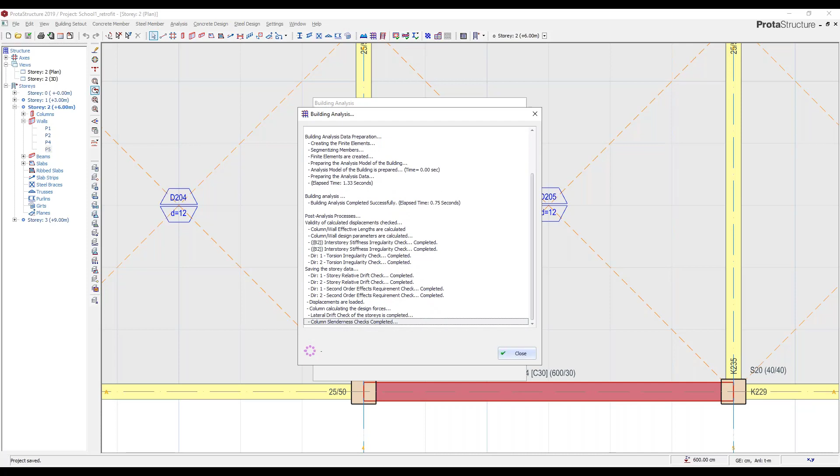Okay, close. And again, I will go to the column design menu. In the column design menu, if I filter the walls only - before the webinar, I had already selected some reinforcement in it. Let's say 14. Okay. In fact, you can do a batch design. Let's do that. What I did, I analyzed the building with a behavior factor of 4.

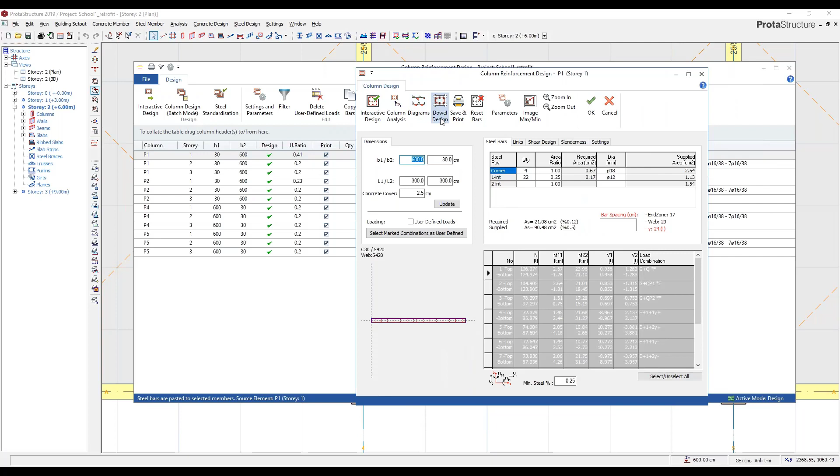I assumed a very limited ductility for the building. And for the preliminary design purposes, I selected some preliminary reinforcement inside the retrofitting walls. And I go and double click on one of the walls and check the shear design. So maybe I can select a 14 bar in the web region, and copy and paste to all the walls. But if you pay attention, when I double click this, it's a retrofit wall. So we have an extra button here, which is called dowel design. You can also design the dowels, because these retrofit walls will be installed between the existing frame.

You will not just tear down the existing beam or existing columns. You will just put the wall in between these existing beams and columns. So that means you will have to introduce some anchorages or dowels inside this existing frame.

So these dowels can be calculated by ProtaStructure as well. Here you see the number of top dowels, left dowels, right dowels. All of them are designed. It's nothing but a friction shear check, because we have a shear force acting at the beam-wall interface.

And also we have constructive dowels here, so this design is done. And also in Prota Details, you can get the detailed drawings for these dowels as well.

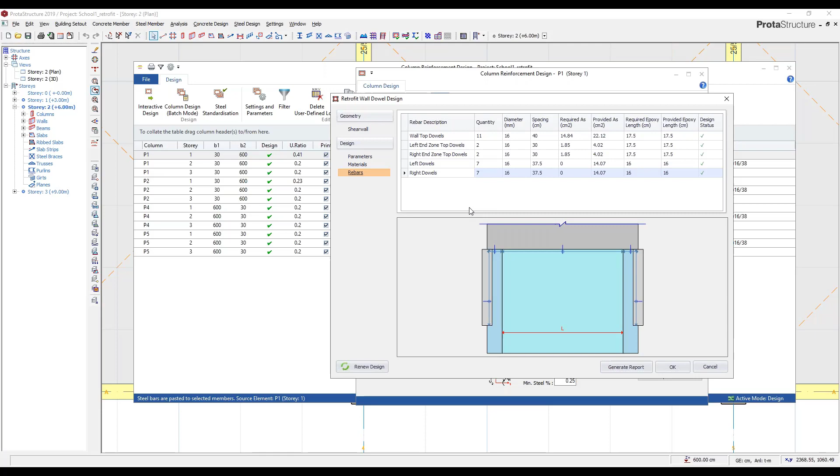Okay, let's say cancel. So now I have existing reinforcement, and a preliminary reinforcement in the retrofit walls. All I have to do is go to analysis, building assessment.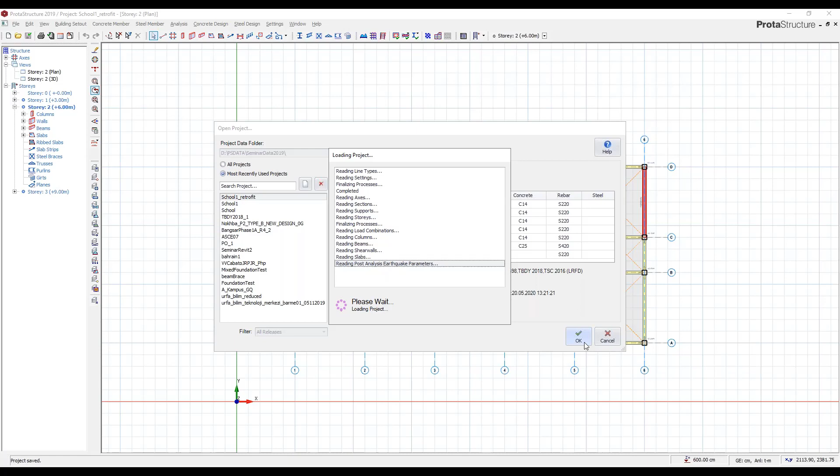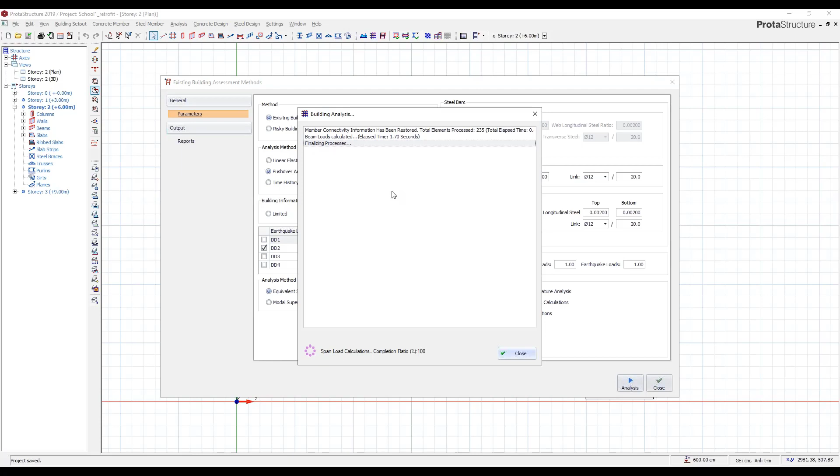After this, the operation becomes repetitive because now I select pushover again, and we will create the analysis model for the pushover. What we do is analyze the building once more with behavior factor 1, importance factor 1, and eccentricity 1, and we prepare the building for pushover analysis. So that's what we are doing at the moment.

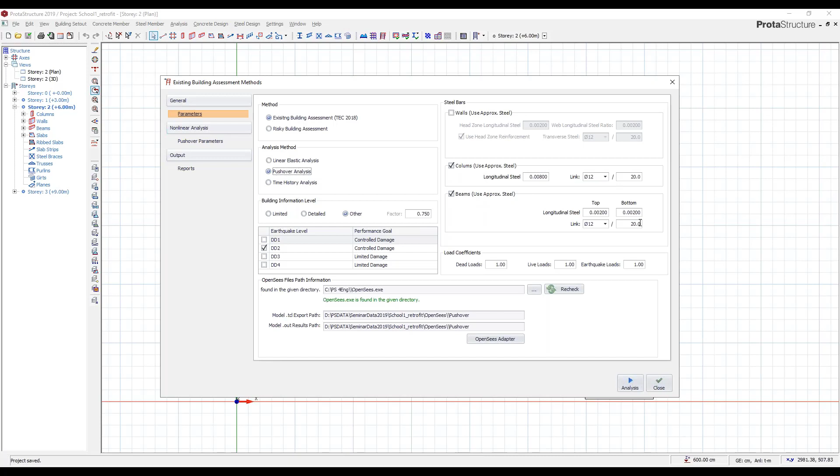We have existing reinforcement in the columns and beams, and preliminary reinforcement in the retrofit walls. Let's go to pushover parameters. Again, I'm doing the analysis in the X direction, and I will push the building up to 0.012 meters.

Let's see, that's pretty much the demand displacement. So again, we are preparing the force-deformation relationships using the existing reinforcement.

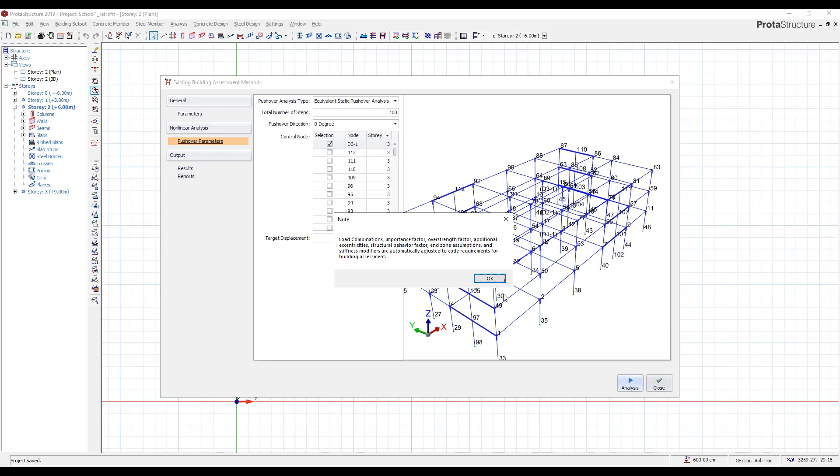Now the performance goals are satisfied. With this retrofit scheme, I could satisfy the performance goals. This is the pushover curve that I have here.

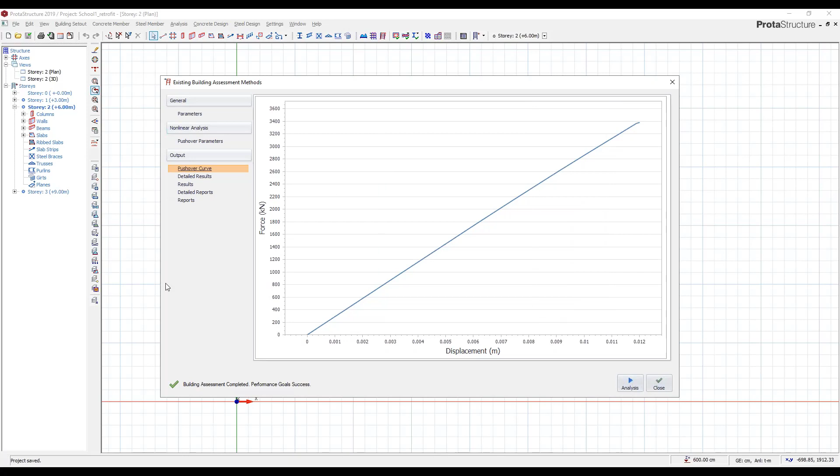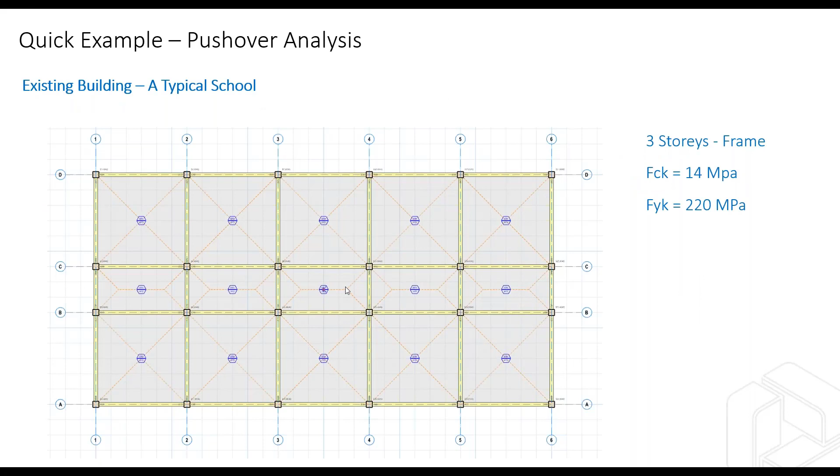So let's go back to the slides. This was the retrofit layout that I proposed. I used 30 megapascal and 420 megapascal concrete and steel.

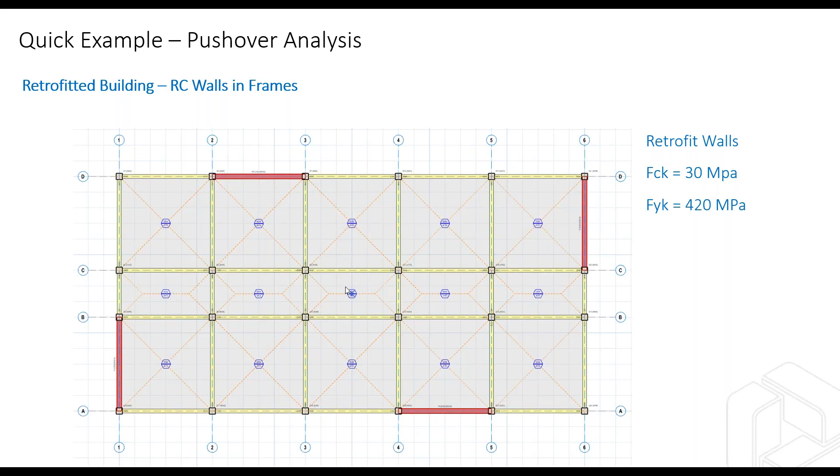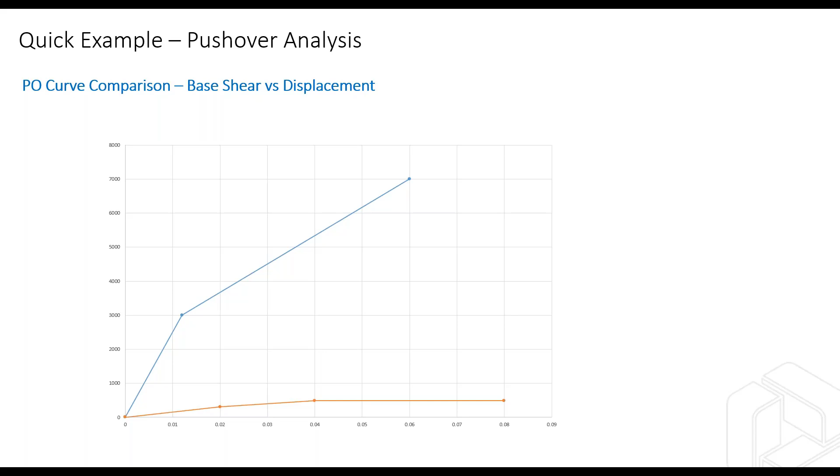This is the comparison of pushover curves. The blue one is the retrofitted structure, and the orange one is the existing structure. It is the base shear versus displacement curve.

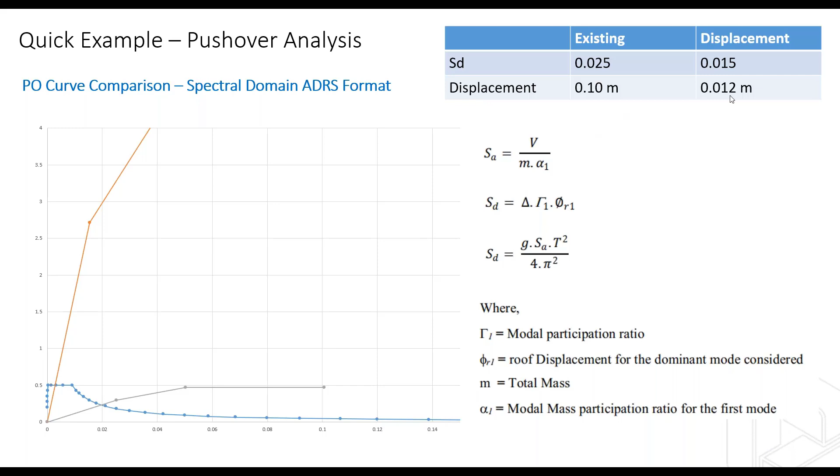If you do the conversions and calculate the demand, for the existing building we have approximately 0.1 meter demand from the earthquake, and for the retrofitted building we have approximately a 0.012 meter demand.

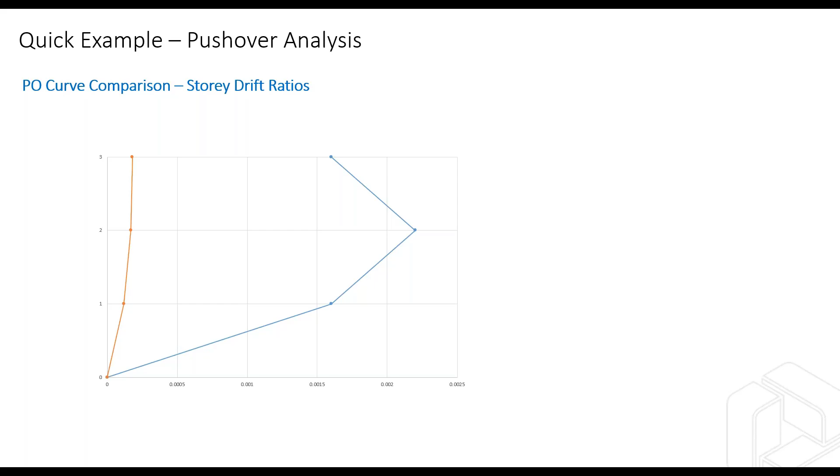So technically, that's pretty much I want to talk about. I hope I could cover what I want to achieve, and I hope you like what I talked about.